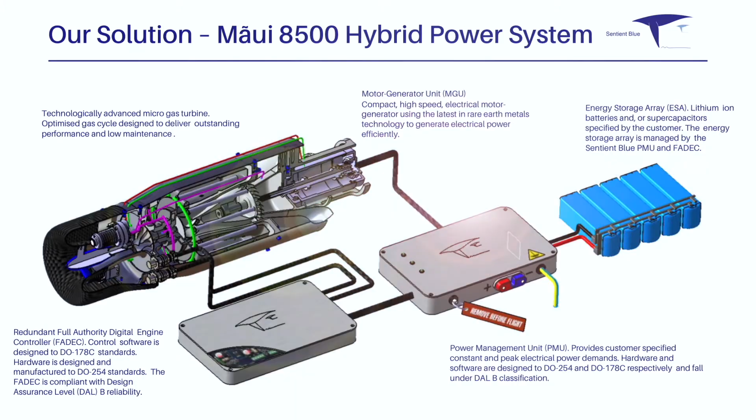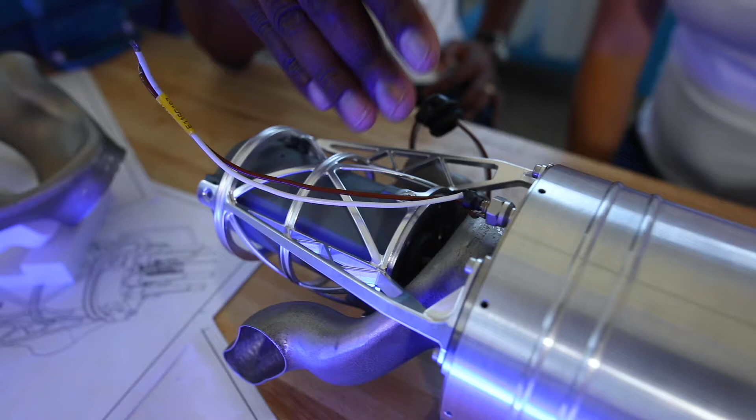That means that for a typical Part 107 multicopter operating at the 25 kilogram weight limit, we can deliver an increase in flight time by at least a factor of 4 to 5. We're starting with the Maui 8500 hybrid system, designed to develop 8.5 kilowatts of constant electrical power and 16 kilowatts peak with a line voltage of 48 volts DC. The production version of the Maui will weigh in at only 3.63 kilos, and the fuel consumption target is a competitive 450 grams per kilowatt hour on entry into service.

For fixed-wing UAVs, this increase in flight time would be much more, and the entire operating envelope would be significantly enhanced. Flying under FAA regulations, you can have a service ceiling of up to 25,000 feet with our Maui 8500 hybrid system. Our hybrid system will enable UAV missions that are not possible with current lithium polymer battery technology. And recognizing the potential of our hybrid technology, Sentient Blue won Genius New York 2019.

The winner of this year's $1 million Genius New York prize is Sentient Blue. $1 million.

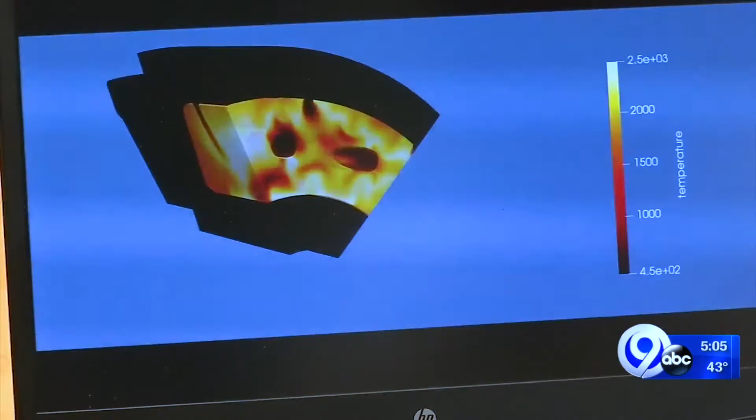We certainly got a few people's attention over the past year. Genius New York is an amazing organization, and we learned a great deal from the Genius team. After finals night, we were even more motivated than ever to make our dream a reality, and we were back at it the very next day to bring our hybrid technology to the UAV world.

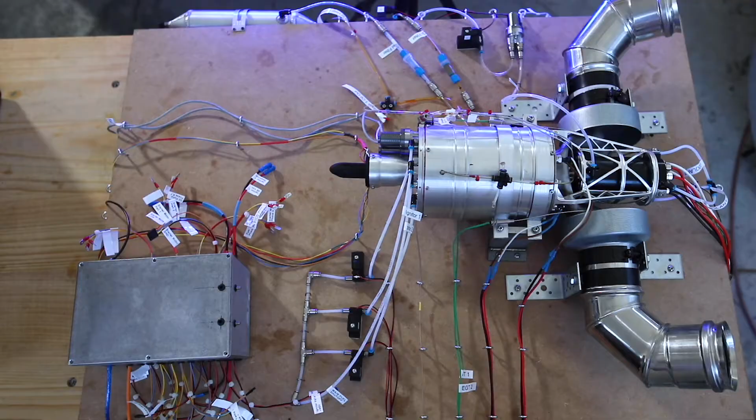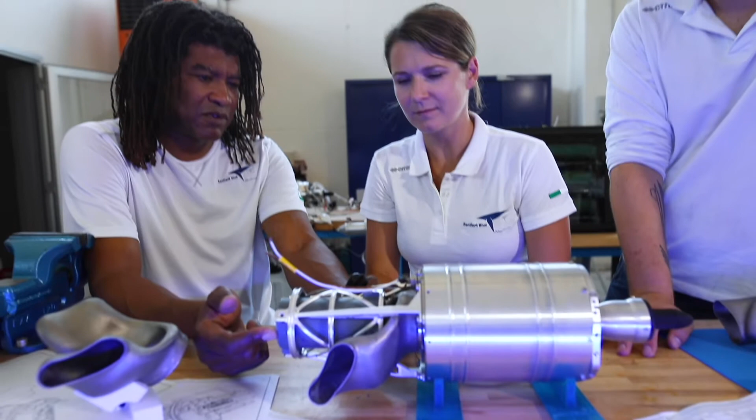Winning Genius New York was a massive boost for us. Those funds allowed us to increase the size of our research and development team, accelerate our development, and improve our product. Sentient Blue has now finalized its prototypes and is in the testing phase. We're gearing up to start production of our hybrids before the end of the year, and we're getting closer to our goal to bring the advantages of practical, efficient hybrid power systems to UAVs all over the world.

Managing a team based in Italy and the United States was a real challenge, and it involved a lot of travel, but we made it work. The company started in Italy, where key members of the Sentient Blue team developed their unique skills and knowledge of hybrid technology, having spent more than a decade working in Formula One motorsports.

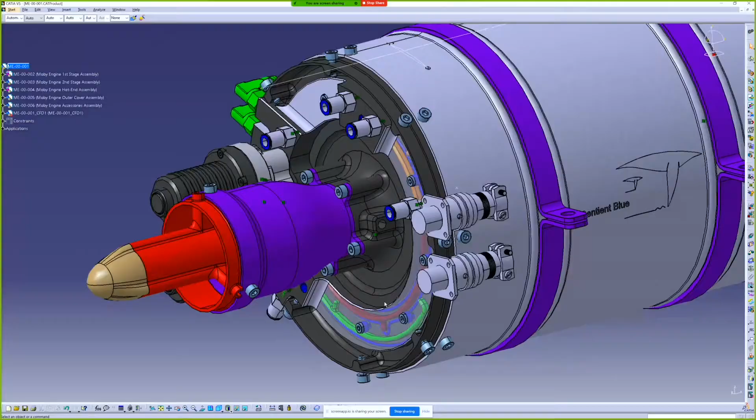Sentient Blue uses cutting-edge software tools like CATIA V5 and ANSYS Workbench, same as used in the aerospace industry, to develop our first product, the Maby 8500 hybrid power system.

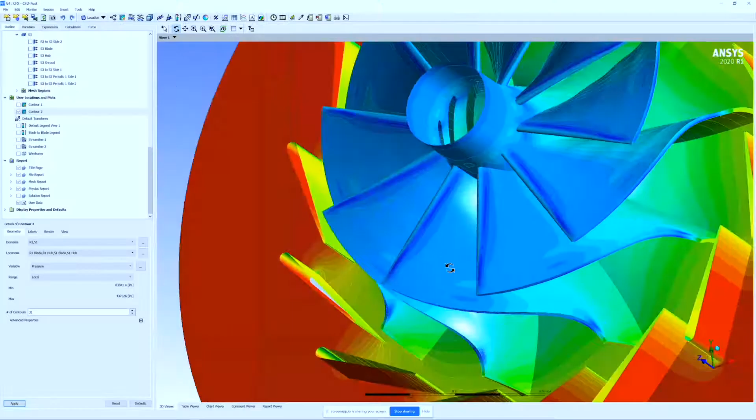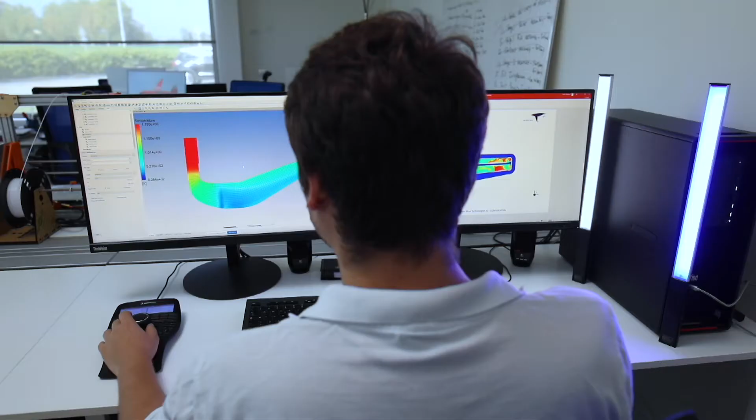The Maby 8500 hybrid system uses readily available Jet A1 or diesel fuel, and will deliver that 4 to 5 factor increase in flight time regardless of the ambient temperature. Compare that to 20 to 30 minutes for a battery-powered UAV in good weather. When the winter comes, their flight time is reduced by at least a factor of 50%. Our hybrid systems are not affected by the cold.

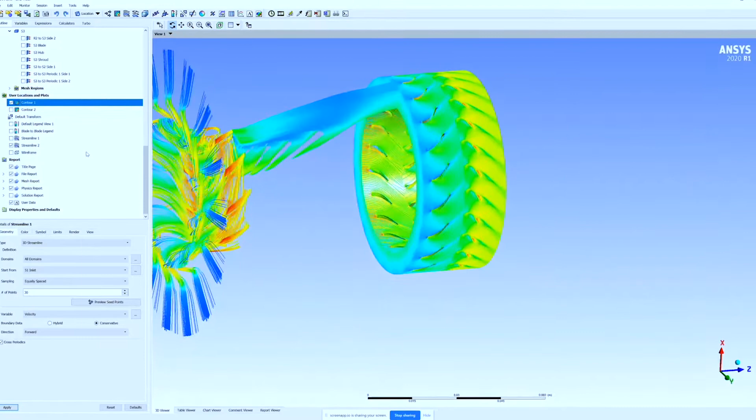Sentient Blue is a mission enabler. After refining the ideal specification for our initial hybrid system, based on market research, we froze the engine layout in September of 2019. We designed the motor generator unit, or MGU, which is being manufactured by NEMA Limited in the United Kingdom, and that was finalized in October of 2019.

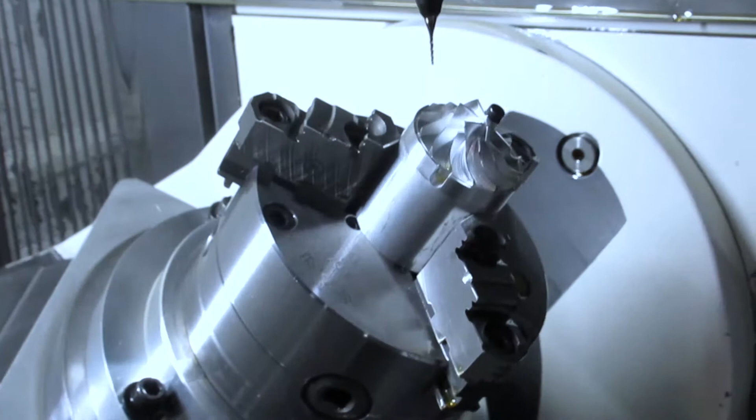We have extensive contacts with the best aerospace suppliers in the USA, Italy, and the United Kingdom, and we're collaborating with them to manufacture our designs and to supply us with the components for the Maby 8500.

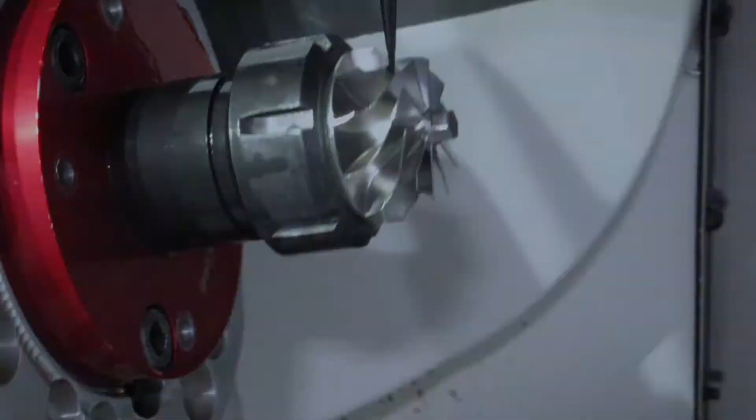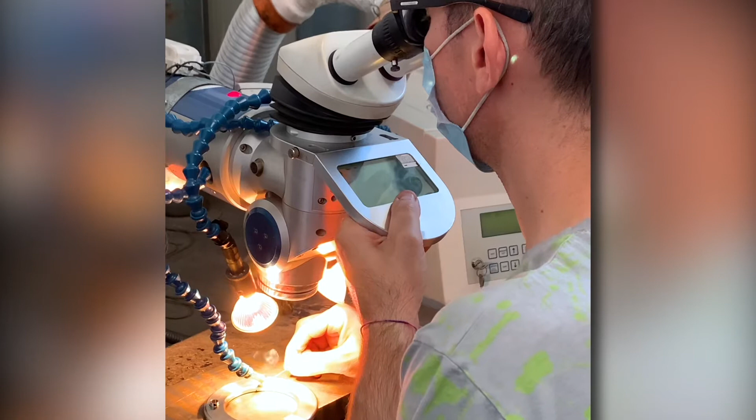At the beginning of 2020, components started to arrive and testing began in earnest. All of a sudden, things became real. We had hardware.

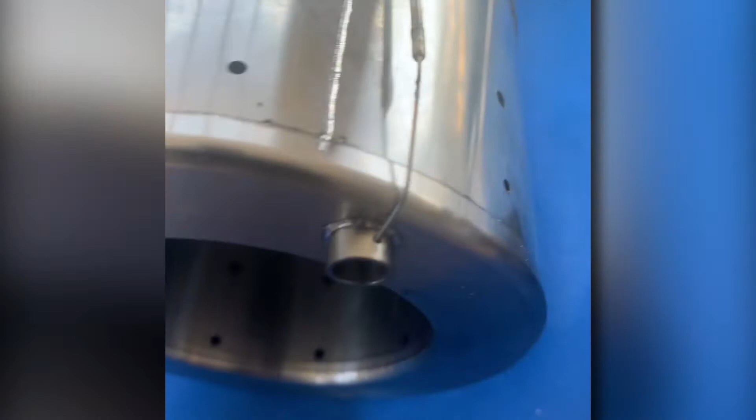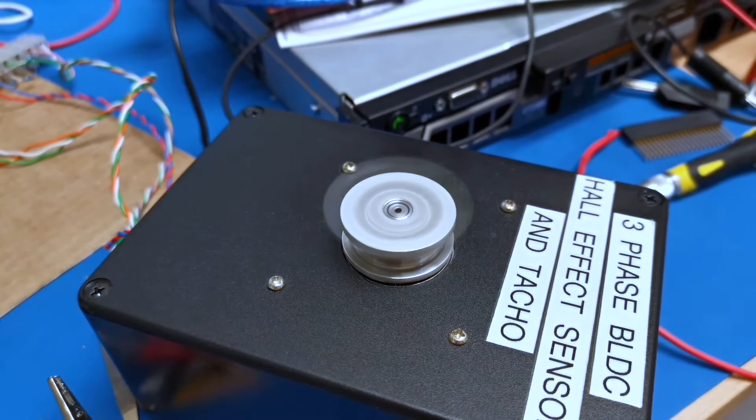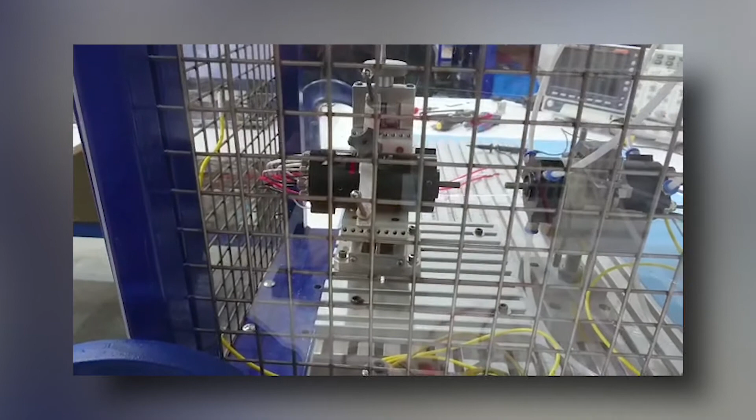We work closely with Mage Control Systems in Scotland. They are our development partner for the control system and power management hardware, which are all combined in the FADEC, Full Authority Digital Engine Control Unit. The Mage team brought our FADEC design to life, and we started testing immediately after the first FADEC boards were delivered.

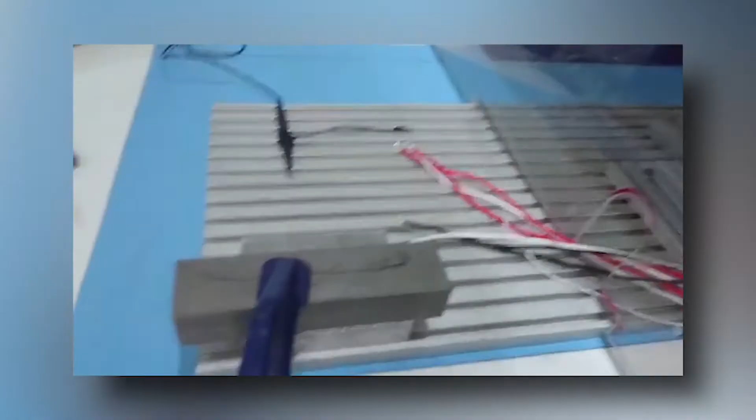Our partner NEMA Limited collaborated to develop a bespoke design for the motor generator unit, the MGU. This is a highly specialized unit generating power at extremely high speeds produced by the microturbine. We optimized this design using the latest computational fluid dynamics tools.

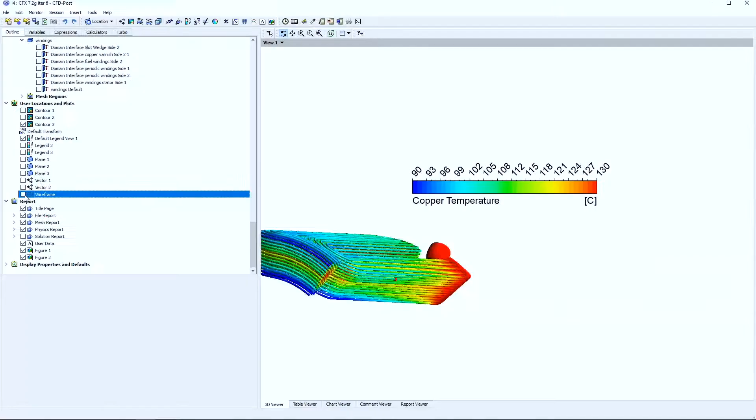NEMA drew on their extensive aerospace experience and know-how to develop a compact, lightweight, high-speed MGU with a pre-production prototype that weighs in at only 1.4 kilograms and produces this 8.5 kilowatts at 48 volts DC, and all of this at 96% efficiency while spinning at an eye-watering 120,000 RPM. And this is just the first step. We're already working on upgrades to make it even more efficient.

Just as we were hitting our stride, the world started to shut down because of what we now know as coronavirus, COVID-19. Our supply chain seized up and delivery times went from a week to months. And for 3 months, we could do nothing. We were in lockdown. Like everywhere else, we had to adapt our schedules and we lost valuable time.

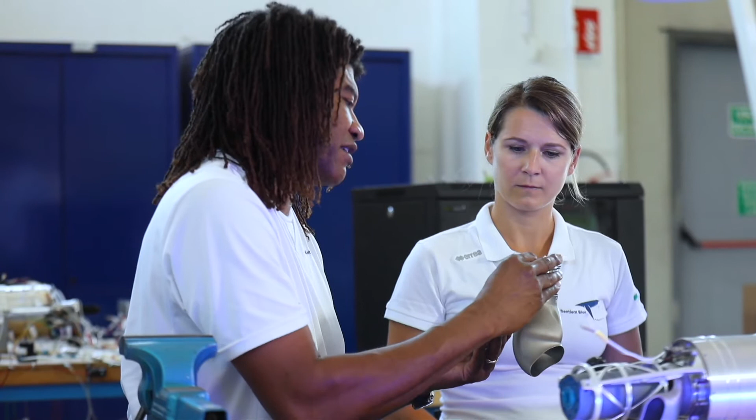But as soon as the lockdown was lifted, we did everything possible to make up for lost time. We started assembly with a passion and went through all the necessary checks. Despite the COVID-19 setbacks, we've completed the prototypes of the OMNIA 8500 and we're now in the testing phase.

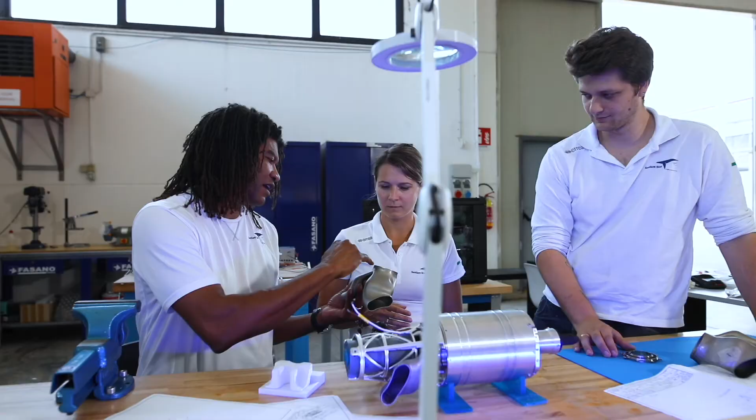Our hybrids, starting with the Maui 8500, comprise exceptional cutting-edge technology. And to achieve this, you need an exceptional team. We've been fortunate to bring together experts that are the best in their field from around the world. At various stages over the years, we've had 5 PhDs leading the R&D effort.

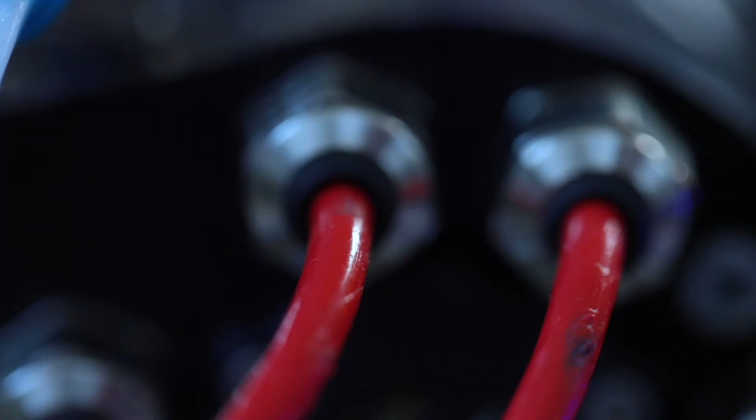Between them, they hold 50 relevant patents, published numerous research papers, and have more than 50 years experience in the aerospace industry and Formula One motorsports. This is the team that developed the Maui technology that was the basis for our first patent filing earlier this year.

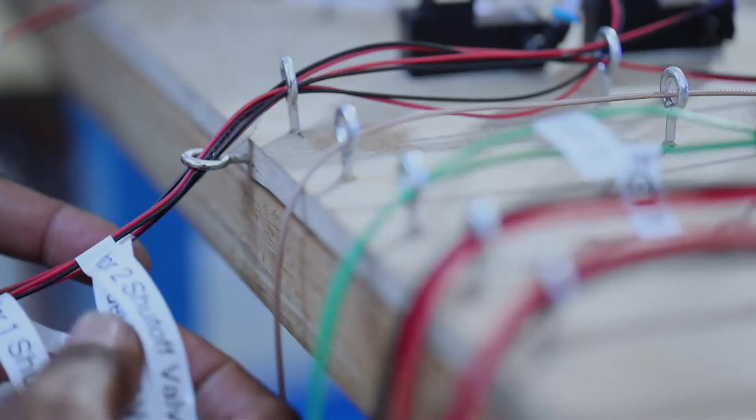Now that we're in the final stages of the development process, Sentient Blue is proud to announce the commercial launch of the Maui 8500 hybrid power system.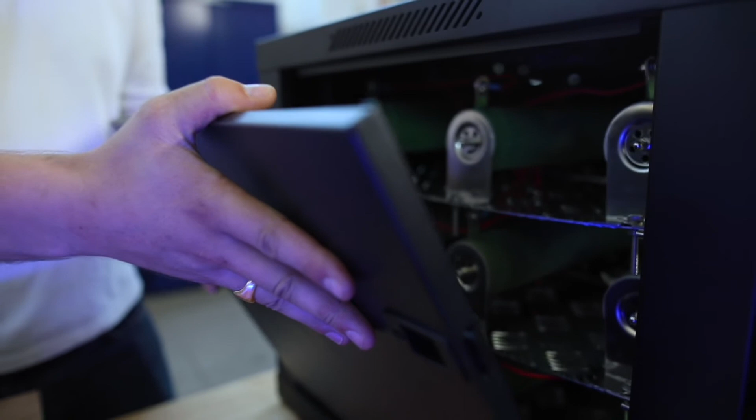Already, we've attracted the keen interest from airframe manufacturers in North America and Europe. We've taken orders and signed sales contracts with BFD Systems in the USA. Vulcan UAV in the United Kingdom are working on a new UAV design optimized around our Maui 8500 hybrid system.

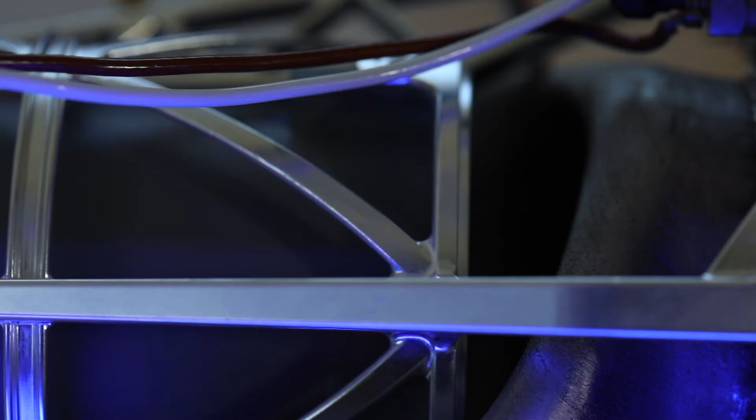We'll start deliveries of the Maui 8500 in the fourth quarter of 2020, and we are laser focused on 2021, which will be a defining year for us.

We are a Genius New York company. We will allow you to fly longer when you need and to fly farther if you want. Think beyond visual line of sight, BVLOS. We are revolutionizing the UAV industry. We are Sentient Blue.